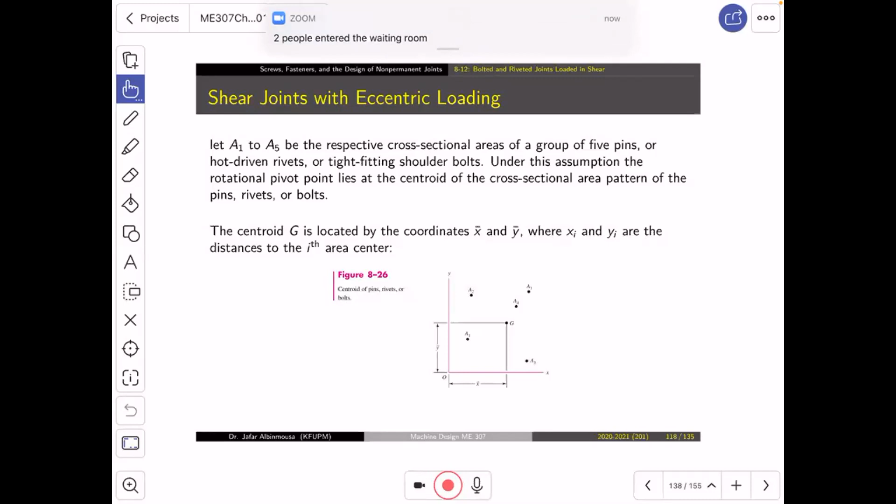There is one important announcement I would like to make, ya shabab, I need your attention over here. It's a little bit confusing. Sunday, next week, we are not going to have a lecture. On Sunday, you have a lecture substituting a normal Wednesday. And on Monday, we will have a lecture substituting a normal Thursday, which means our regular lecture will be on next Monday. We will still have another lecture this week, which is on Thursday. But the week after, we will not have a lecture on Sunday. We will have a lecture on Monday. Do you understand that? Is it at the same time? Everything is the same.

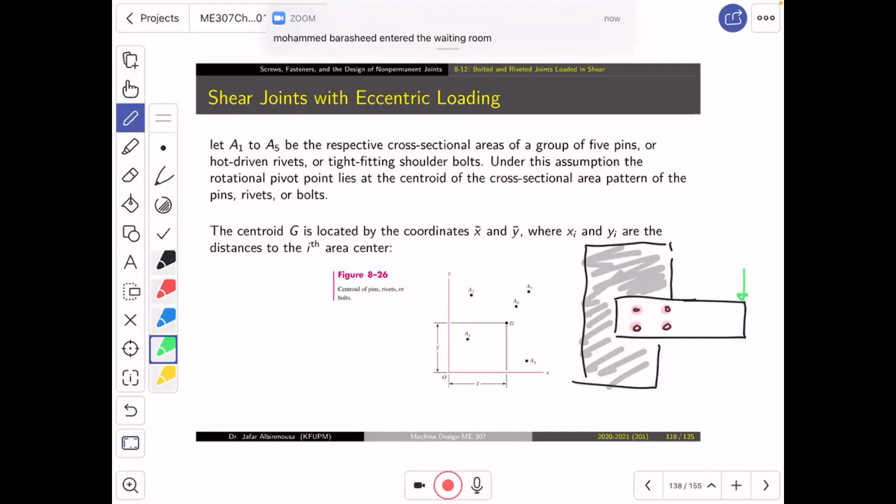It is about bolted joints. So we have a bolt in a simple way for, let's say, a plate like this. Let's say this is the wall. And then you use bolts, this one, this one, this one. And for another reason, there is a load like this. Now, what will happen is very simple. Let me tell you what will happen. Just bear with me. There is a little hint which is very important. If you understand it, that's it, we're done. This section has one single equation which is new. The rest is very simple.

So what is happening? Let me draw this again. This is now the plate. And this is bolt number 1, 2, 3, and 4. And don't forget, sorry, the wall should be somewhere here. What do we have? We have a force applied here. This force we will call F. I'm trying to make it bold here to show that this is a big F. Now, what is going to happen is the following. First thing, we are interested in the bolt. We might be interested in what is going to happen to this member. This member will be under bending, for example.

If you consider that the member is fixed like this, and you apply load to it, and you assume that this is a fixed end, you can imagine that the member might bend. Right or not? So one of the failures of this joint is the bending of this member. Another type of failure, for example, is maybe yielding. Why? Because if you cut this cross section, with respect to the bending, I is not equal to 1/12 BH cubed. Because the plate is not a complete cross section. It has holes, so you need to take the holes out. But everything here is just bending, exactly what we did before.

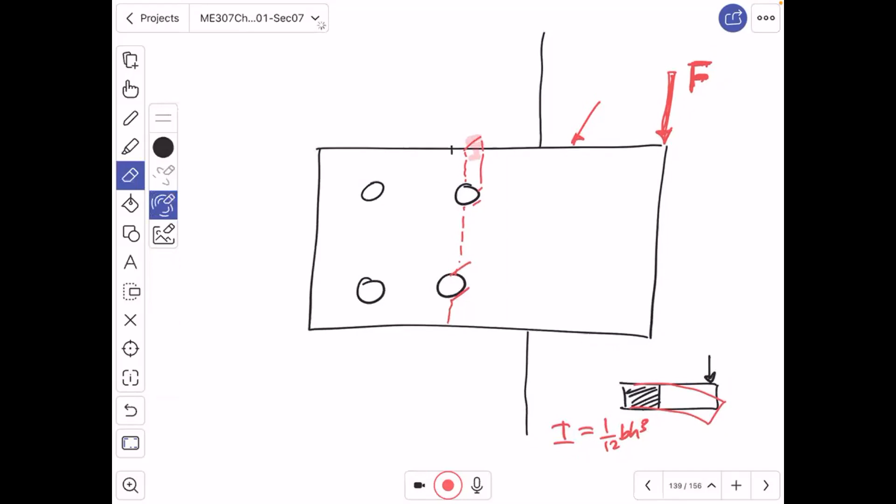Now, if we want to know what will happen to the bolt, which is something very new to us, then it is fair, ya shabab, to say that over here, I need this to be very correct. So if we think about the bolt, ya shabab, what do you think this force F is going to do on the bolt? Any suggestion?

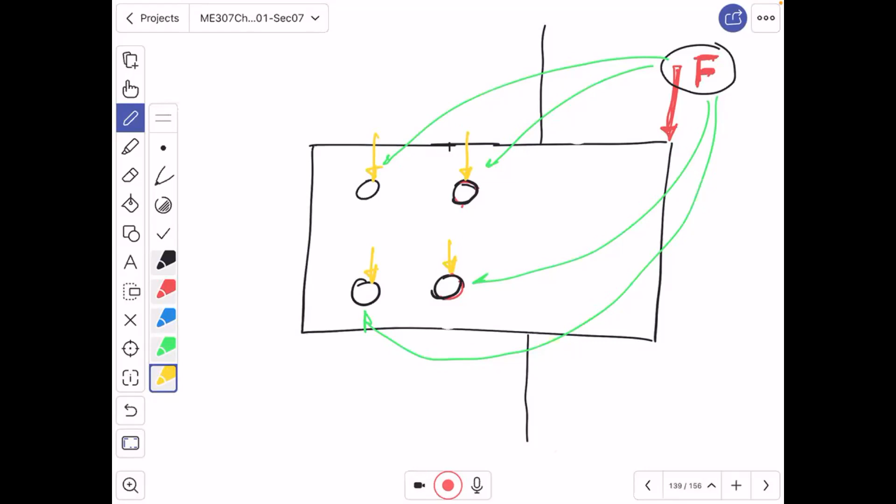So why, ya shabab? Because from the side, this is the plate, this is the wall, okay? The force F is acting there in the back, and the bolts are here. These are the bolts. So when the F is divided as yellow forces, they are actually trying to shear off the bolt. So we will call this one a direct shear, and we will name it F prime. And this one F prime, and this one F prime, and this one F prime.

Now, in order to understand things and talk in a clear way, I am going to call this one bolt number 1. This is bolt number 2. This is bolt number 3. This is bolt number 4. For that reason, I'm gonna call this one F prime 1, F prime 2, F prime 3, and F prime 4. Now, what is F prime 1, F prime 2?

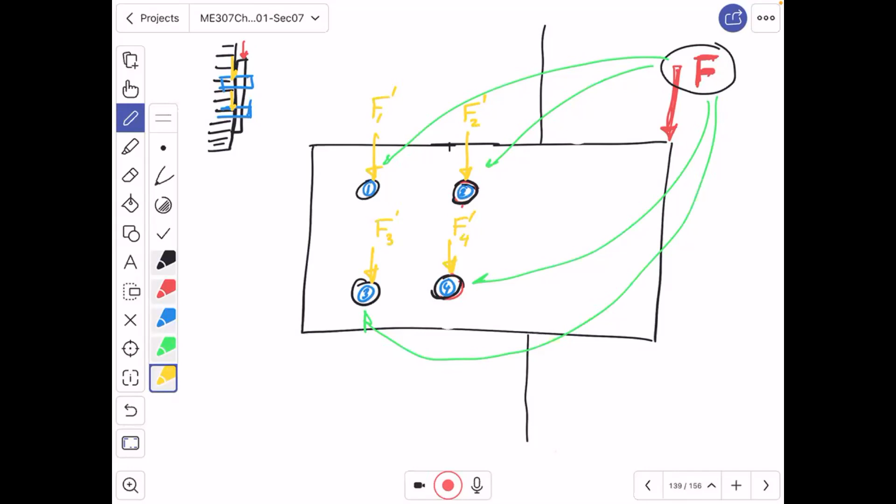This F prime 1 is equal to F prime 2, which is equal to F prime 3, which is equal to F prime 4, which is equal to the red force F divided by 4. If I have 5 bolts, I will divide by 5. If I have 6, I will divide by 6. If I have 3, I will divide by 3. If I have 2, I will divide by 2.

I forgot to turn on my webcam, by the way. Good, ya shabab, if you are listening.

Now, there is another thing which is going to happen, which is the fact that this force is shifted from the bolts. And in order to make things easy for us, we're not going to treat each bolt alone in the beginning. Let's just think of this as an entire joint. If we think of those 4 bolts as an entire joint, then we can fairly say that by geometry, if this is a symmetric joint, the diagonal over here is going to represent the center or the centroid of the joint.

And thus, ya shabab, if I take this distance, let's call it D, or you know what? No, not D. Let me call it X. If I take this X as a distance and I have a force, then if I want to know what will happen to the bolt, there is another load, a moment load, which will be applied in addition to the yellow one. This moment load is M. And M is acting like this. Now, this is the story. What is this M? What is it?

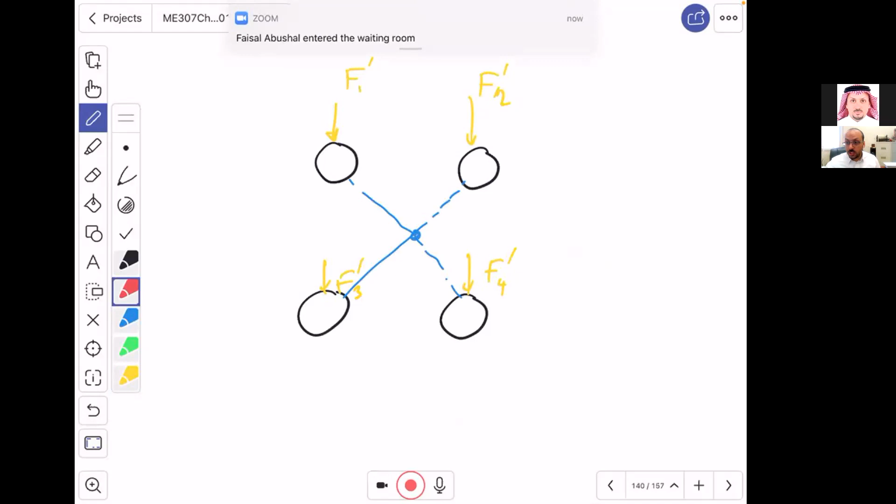So what will happen is the following. If we think about it, these are bolts 1, 2, 3, and 4, and now they are subjected to F prime 1, F prime 2, F prime 3, and F prime 4. The moment, ya shabab, look, the moment will be converted into a shear couple of forces. How is that? Look, the moment was in red. Am I right? I wrote the moment in red. So what will happen? This moment will be converted as F like this.

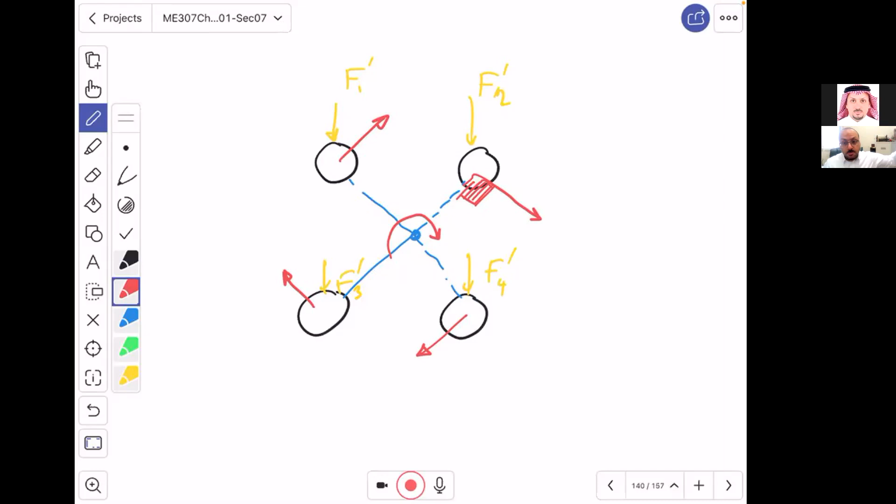Notice, this F is perpendicular to the diagonal, and then another F like this, and another F like this, and another F like that. Now, this is a moment, but this moment is generating a couple of shear forces. These forces are trying to cut the bolt from the side. And in order, ya shabab, to distinguish between them, F prime, this one, we call it primary shear force. This one, we will call it secondary shear force.

What is the secondary shear force? Look, we're gonna call it F double prime 1. And this one, F double prime 2. Why double prime? Because it's secondary. Why 2? Because it's at bolt 2. So this one is going to be F double prime 4, and this one is F double prime 3.

Now, this is the question. I converted everything from F, the red one, back at the end into a local group of forces acting on the bolt. How can I assess the health of the bolt right now? Well, the next step is to do the following. In reality, ya shabab, there is an equation which is going to convert M into F double prime. And when we convert M into a set or a group of forces, they are just going to be forces.

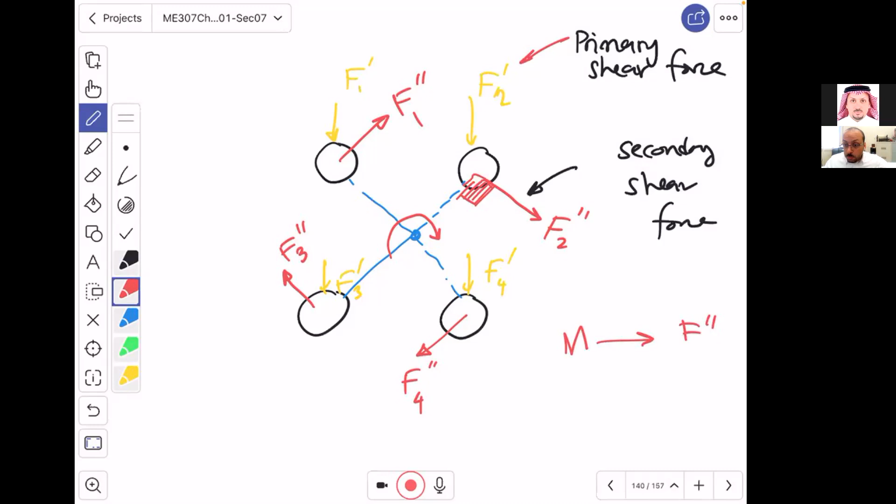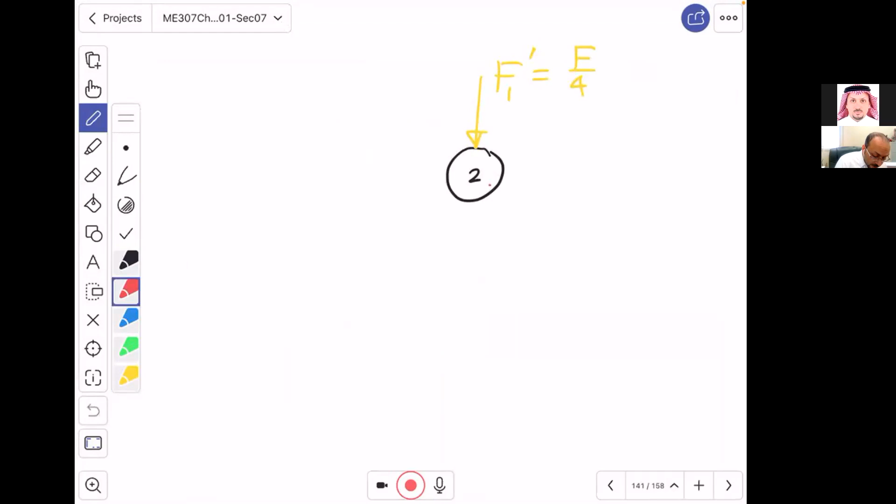So you can imagine that bolt number 2, this is bolt number 2, is subject to F prime 1, which is equal to F over 4. I know the magnitude. I know how much I am applying. I just need to divide it by the number of bolts. And if I have F like this, which is F double prime 2, then, ya shabab, this is so familiar, right? Why? Because this is a vector.

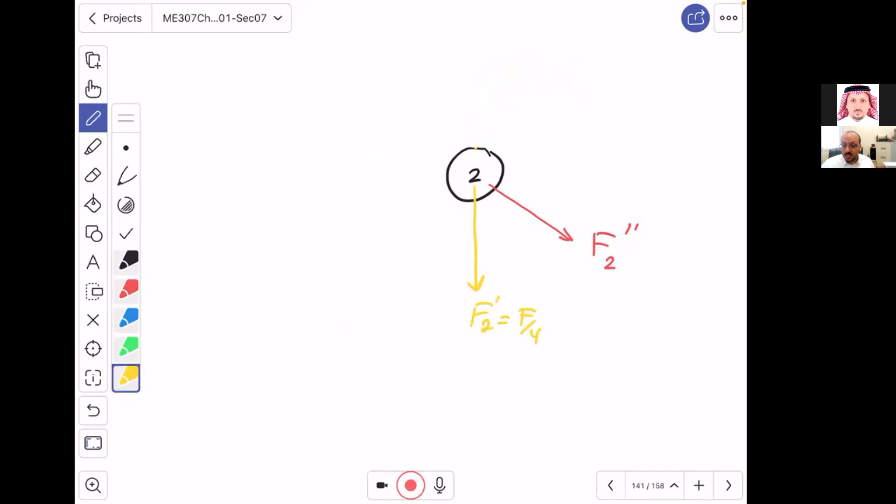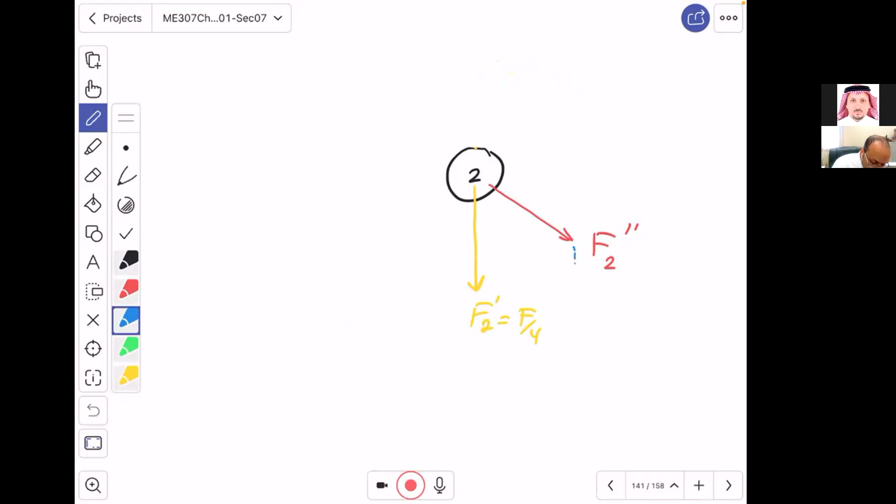I can come, take this, and shift it down. Look, I'm going to shift it down here. Call it F prime 2, which is equal to F over 4. And now I have two vectors. So if you think about it, I can get the resultant. When I get the resultant, okay, I will have a resultant shear force.

This F resultant is going to shear off the bolt. And if I can know what is the maximum shear, allowable shear, I can compare this F resultant with the allowable one. I know if it is safe or not. And that's it, we're done. Do you understand? That's it. That's your job.

So, of course, ya shabab, this is how the centroid works if you have multiple bolts, but I am telling you that we would never give you a problem where the centroid of the bolted joint is very difficult. We usually give you 3 bolts in a joint like this. We usually give you 4 bolts. We can give you a problem of 3 bolts, something like that. So the centroid of the joint is not very difficult.

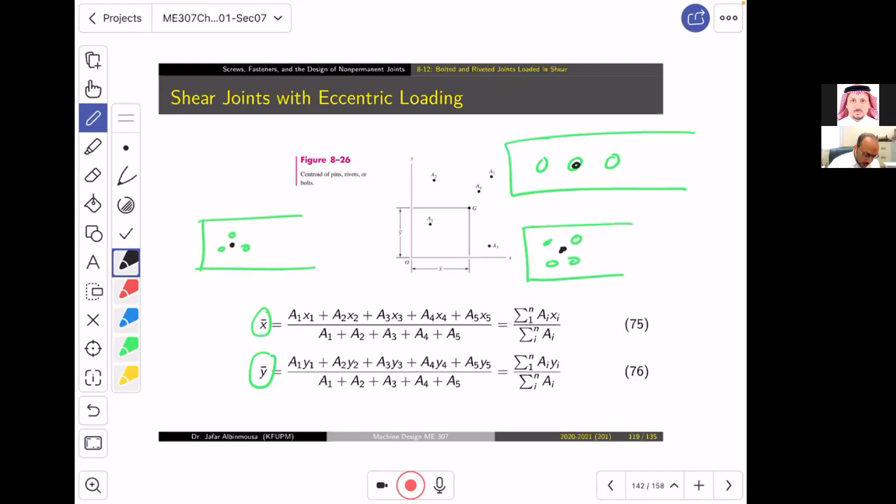Why? Because if you know the centroid of the joint, you will be able to get the moment and then convert that moment into secondary shear forces. That's the story. So how do we do that? This is the explanation of what I told you. And over here is the equation which tells you how to convert the moment into shear forces. So what is this equation?

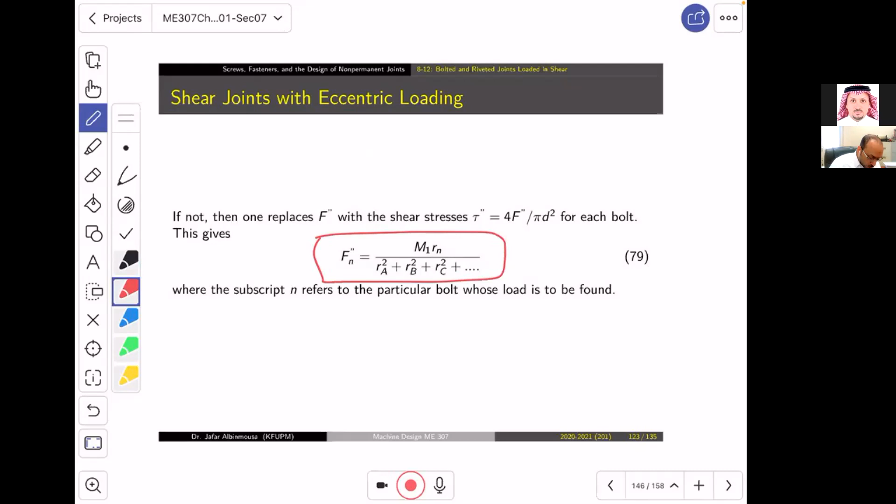Look at it. It says that F double prime N, where N is the number of the bolt, is equal to the moment multiplied by Rn. So what is Rn? By N, I mean the index of the bolt. If you're talking about bolt number one, for F1 double prime, you have M, the moment, which is the force multiplied by the distance to the centroid. And then you have R for bolt number 1. What is R for bolt number 1?

If the centroid is here and bolt number 1 is here, then this is R1. If bolt number 2 is here, then this is R2. If bolt number 3 is here, this is R3. If this is 4, then this is R4. Do you understand? Then after that, you divide by the sum of the squares of the distances for all of the bolts. So if you have 4, you put the squares of R1, R2, R3, and R4. If you have 3 bolts, you put the squares of R1, R2, and R3. That's it. And then we will have these forces, through the geometry, combined into a resultant force.

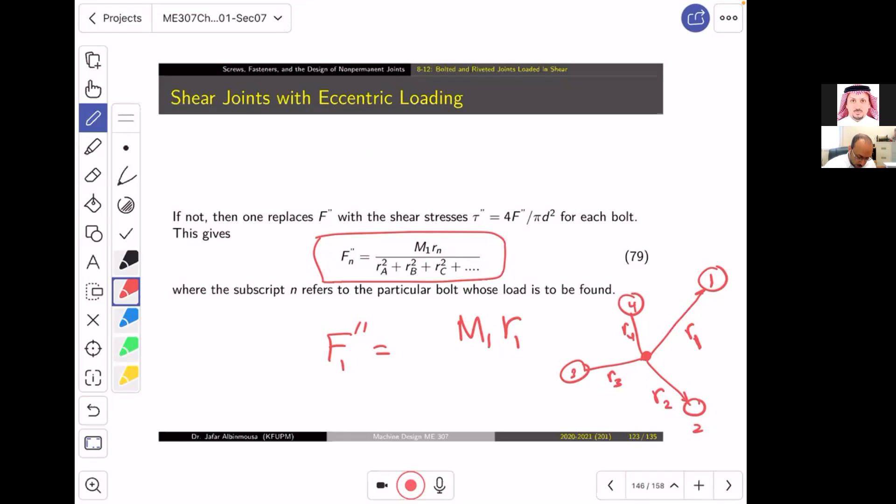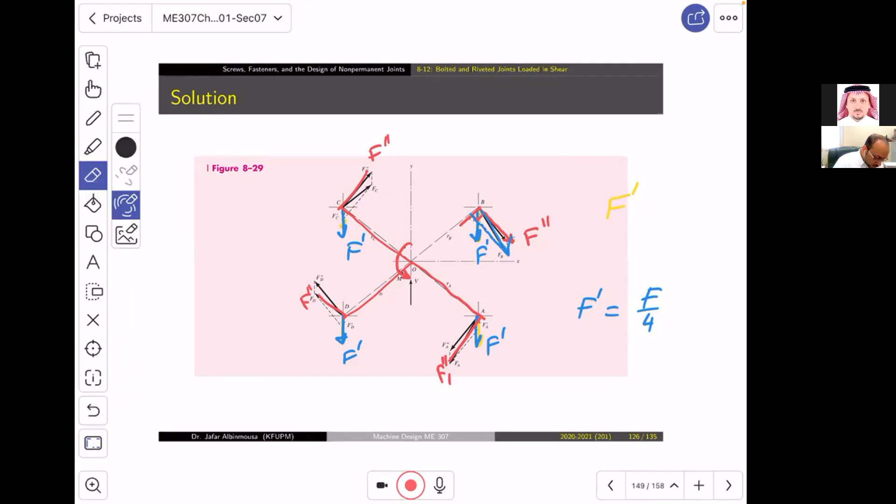That's it. You get the resultant force, and then guys, what's the most important thing to know in this problem? Let me clean it up. The problem that we face over here, if you look, this is going down, this one is going down. So it is fair to say that this force is going to get an action of addition, while this one is going up, this one is going down. This one is going up, this is down. This one is going down, and this one is going down. So what will happen? All the time, this is what we face.

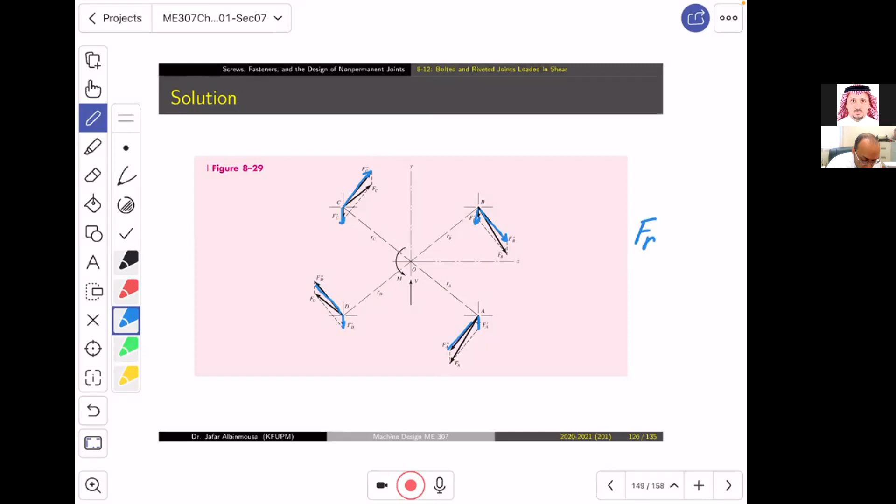We discover, guys, that there is either 1 or 2 bolts that are more dangerous than the others. That is, the resultant force for bolt number 1 is something. The F resultant for bolt number 2 is something else. The resultant force for 3 is something. The resultant force for 4 is something else. One of them, and sometimes 2 of them, get a bigger share, so they become more dangerous.

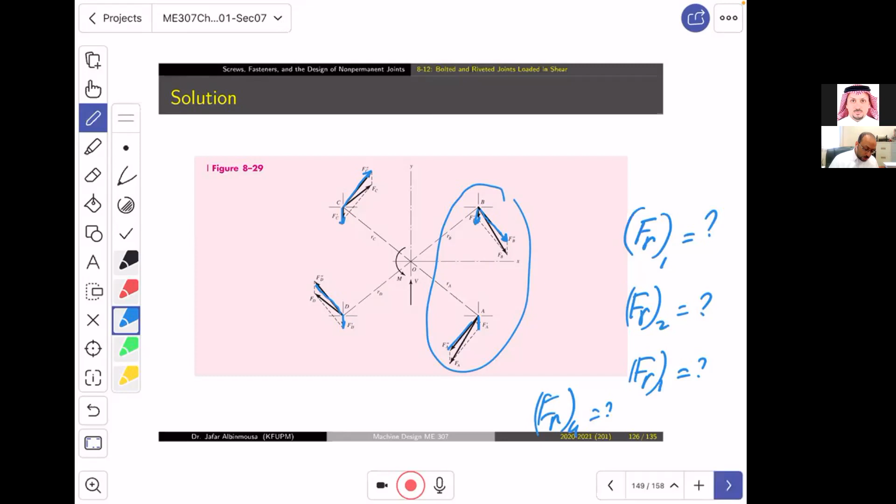And for that, we ask you in the exam, which bolt is dangerous? Which one is the dangerous one? They are not going to be all the same. And sometimes, for example, in here, I think these two bolts will be at risk. And sometimes you get one bolt at risk, the rest are fine, depending on the geometry. Do you understand? So what will happen over here? Of course, guys, this is teaching you how to find the R. And then look, this is the primary shear, which is F/4.

And now look at this one. I want you to understand this equation, which is F double prime. Now, because the bolts are spaced at an equal distance, then F double prime 1, F double prime 2, F double prime 3, F double prime 4 are all going to be the same. And what is going to be the equation? As I said, it is equal to the moment multiplied by the distance of the bolt, which is the same. All bolts are exactly at the same distance from the centroid, divided by R1 square plus R2 square plus R3 square plus R4 square.

And because R1, R2, R3, R4 are exactly the same, R1 equals R2 equals R3 equals R4, which is equal to R. Then we will have this one equal to M R divided by 4R squared. So it is going to be equal to M divided by 4R. That's why. Do you understand that? I cancel this with the square and I have M over 4R.

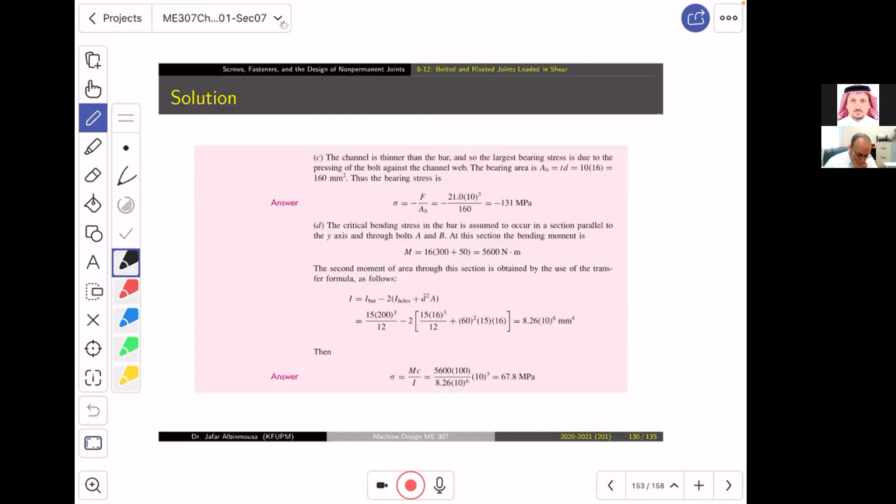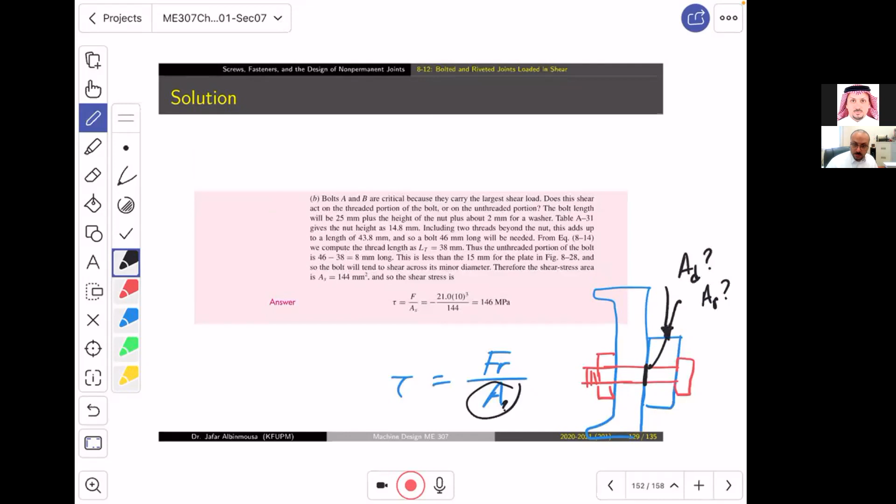So this is one mode of failure, which is shearing. The other mode is this. When you apply the load over here, the bolt itself is going to be subjected to bearing load. Why? Because the projected area of the bolt is going to push on the bolt itself. Do you remember what we did before? We have the bearing stress on the bolt, the bearing stress in the member, and bending of the member. All of these could be possible failure modes, and that's why we examine them.

I think I reached the end, and I have to give you the quiz. We can talk about this inshallah later.